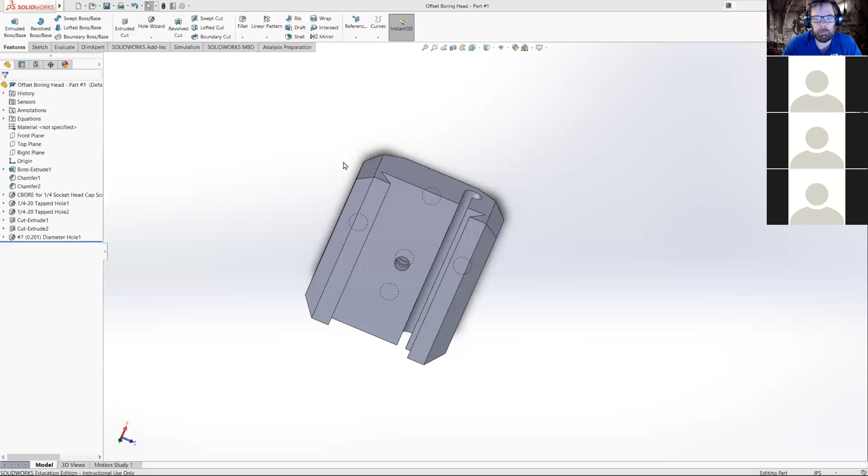Gotcha. So let's get started with some SolidWorks, not Mastercam. Right now, what we're going to talk about today is assemblies. We're going to go over the basics of assemblies. We talked a little bit about it yesterday, and we're going to go into it a little deeper. So basically what we're going to do is make our offset boring head.

So I already have my 6 parts drawn, 1 through 6, materials already determined and all that. So what I want to do is start off with the part that's going to make the most sense as far as which part I start with. Because if you remember from yesterday, whenever I create an assembly, the first discrete part I put in there is going to become fixed. SolidWorks will automatically make it a fixed component.

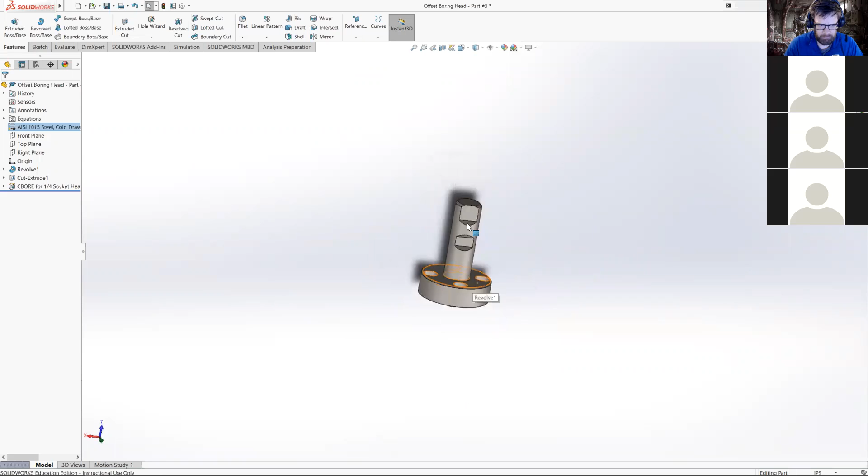So that's something to keep in mind when you're putting these assemblies together, because part number 1 actually slides back and forth on part number 2, or vice versa depending on how you're looking at it. With this, because it's a tool, one way to think about it is: what's the part of the tool that we hold onto? If I think about what part of this I actually hold on to, it'd be the shank. So this is the part I'm going to start with in my assembly.

So I have my parts, they're all fully dimensioned and everything, and from here I'm just going to create an assembly. I go up to new and make assembly from part assembly. Come back to my templates - I don't have any templates for assemblies. You can make templates for assemblies, but in my experience, for the parts I've used, I haven't seen much use for it, so I typically don't do that. So I'm just going to take part number 3.

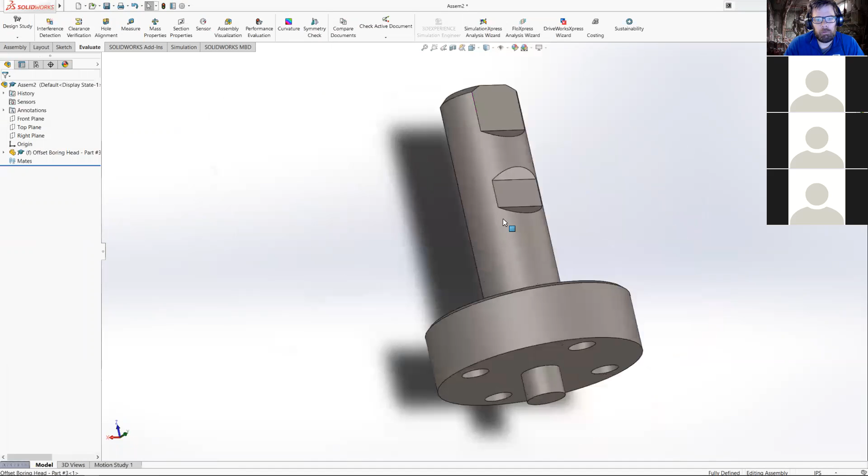That's my shank part, and I'm just going to click out into the ether here. So right now I have my shank part, and I know it's fixed because when I come over here, there's a little F in parentheses next to it - that's my fixed part.

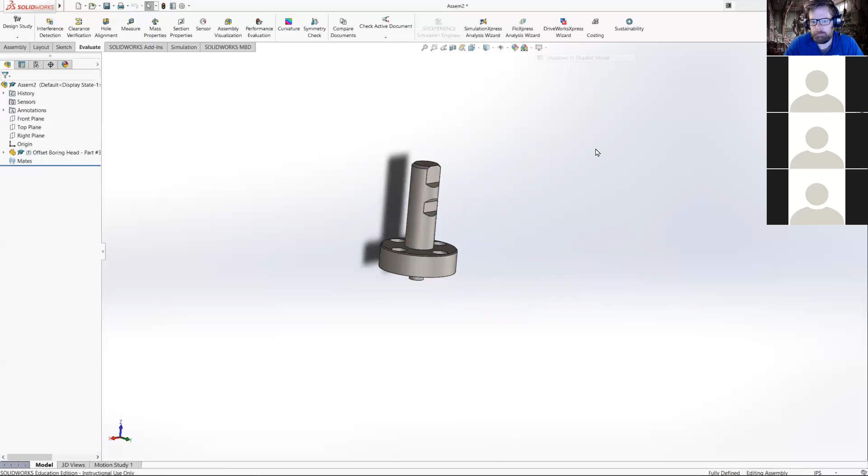I can also tell I'm not really looking at it from the top. If I go to my standard views, my top view is going to be that, or front is going to be that view - top view would be somewhere else. I'm not really going to worry about that, it just changes where the shadow is. If I don't want that, I can just get rid of shadows - that's easier than moving this around. If I did want to move this around, say that really bothers me - obviously if I'm using this, my shadow light's coming from the top, so my shank would be pointing up in that direction.

So let's say I'm being nitpicky here and I want to fix that. All I really need to do is float this guy. Right now it's fixed and I want it to float. Floating just means it doesn't have any constraints on where it lies in our model or assembly. So when we click float, it gets rid of the fixed symbol, and now I can drag this around wherever I want. This in itself isn't really useful because I can move it, but it's still going to maintain its original orientation.

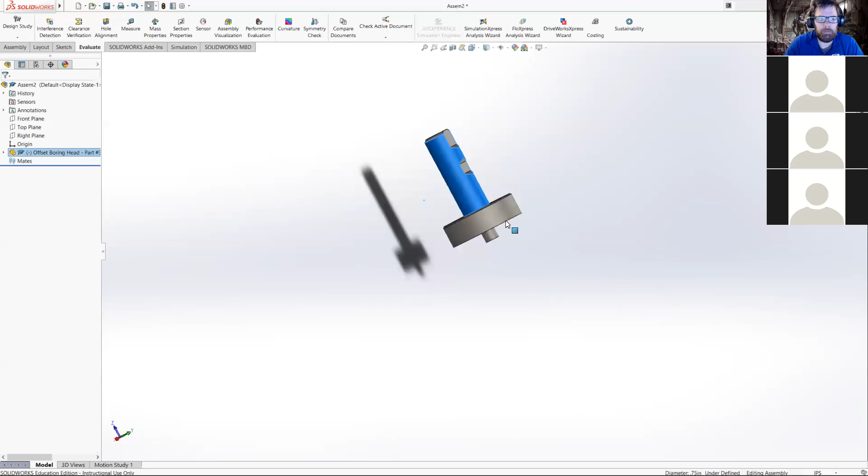So what I can do is right click this and move with triad. Triad is just a gnomon - it's the XYZ. With this, this should look very familiar - this is basically the same as in Mastercam, where we can drag this around.

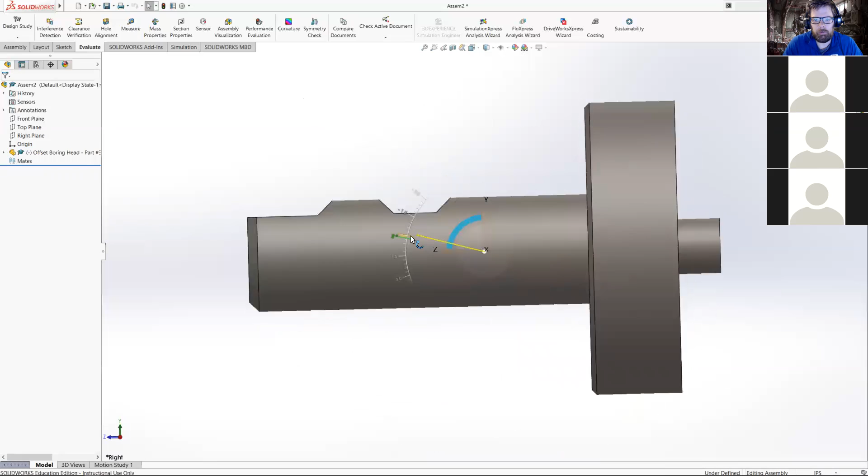Right, so I'm going to undo that. I'm just going to get into a standard view to make life easier. So now I'm looking at it straight from the side. So now when I go from here, 360 is where we are here, and then we're just going to go up to 270.

All right, so if this is the orientation I really wanted to present this assembly in, now I am aligned better, more how I want it to be. If I needed to turn that, I could still do the same thing, move with triad, and turn it around that way. Not really worried about that, but anyway, you can do it.

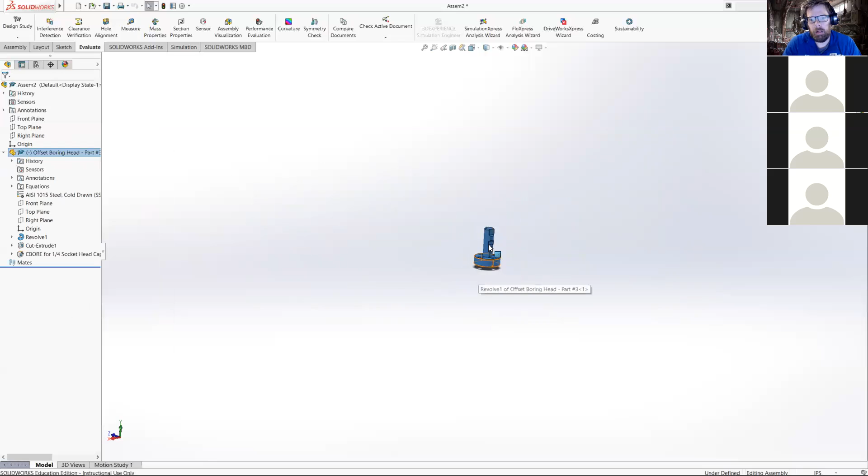So before I start throwing in parts, what I want to do is fix this. So this was floating, or was fixed - I made it floating, and now I'm going to make it fixed again. So again, I just right click and fix, click on the fix button. Yeah, I don't think any of those are fixed.

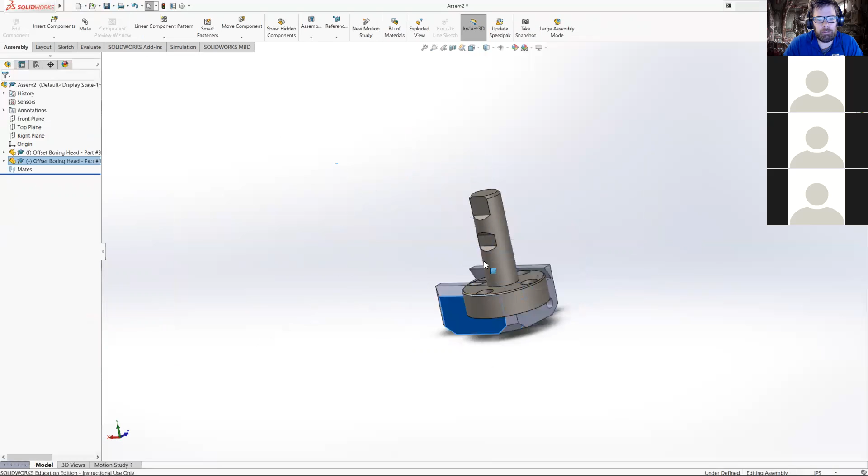All right, the reason I want to do this is because, well, I'll show you in a second. So now I can kind of start throwing in parts. So part 1, I'm just going to drop in there. Now since this is the second part, I look in my feature manager, this does not have the F, so this is free floating. I can drag this wherever I want, literally, because it's not even going to detect any sort of collisions. It doesn't really treat these like solid parts until I tell them to, and really, it's not actually that useful of a tool in SolidWorks. It sounds like it would be, but it's really not.

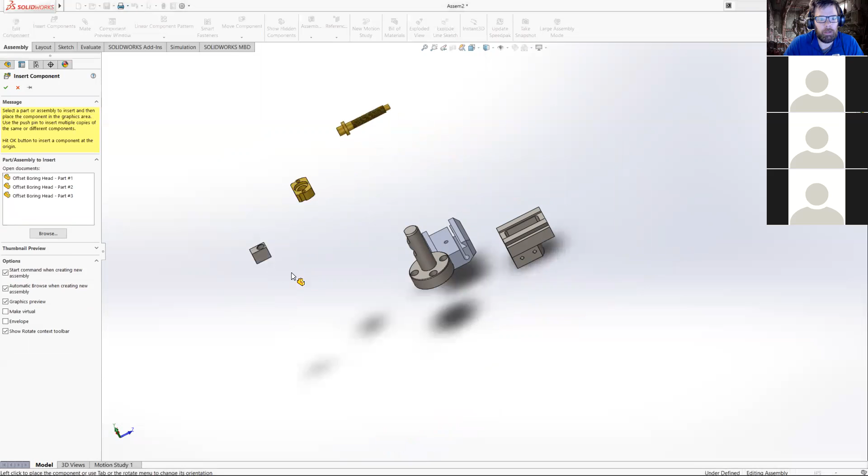All right, so I have parts 1, 2, and 3. I can add these in individually, or what I can also do is a control click. So I can click all 3 of those, and now since all 3 of those are highlighted, I can click - each time I click, it's going to drop the successive part in. All right, so now I have an assembly that is not assembled.

Not super useful. Well, from here, it's basically putting this together like we would if we had these parts in our hand. You know, it's kind of like the skeleton song - hip bone's connected to the leg bone and all that stuff. So really, we're just going to go down the chain and put these parts together.

So when I look at this, I need to figure out how this assembles onto here. So obviously, it's going to need to turn. When I started out doing this, I was just kind of figuring it out on my own, and this is one of those things I actually really struggled with for a while - how to get these parts on here. So the good news is we can just look at the geometry and figure out what this is, or how this is going to fit together. We have a boss here and a hole here and a bolt circle.

So that boss goes in that hole, and these holes line up. So all we're going to do is select that part, and then use this little paperclip guy - that is our mates function. So the mates function is kind of like, or is very similar to relations, and actually, it's the same thing. In fact, when we start getting into this, you'll see a lot of the same concepts.

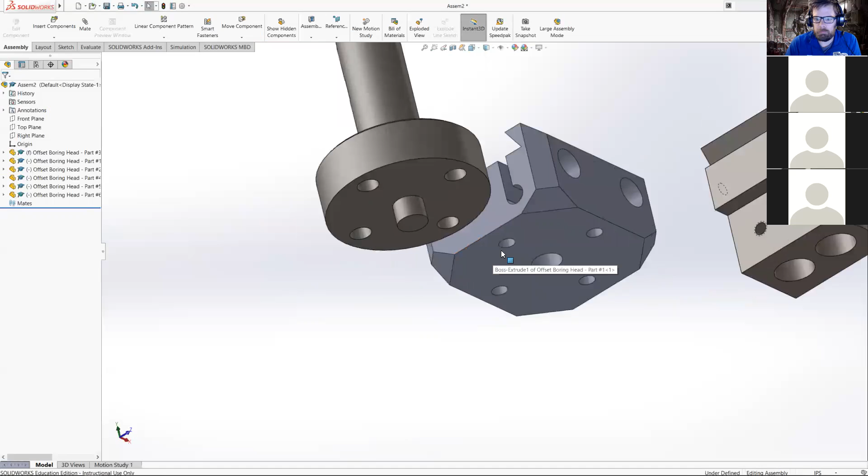So we're going to have perpendicular, we're going to have parallel, we're going to have coaxial or collinear. So we're going to have all these terms that we've kind of learned over the past couple of years, or have learned in blueprint reading or whatever, or GD&T. So some of these terms are going to kind of come back, the concepts and all that.

So it's pretty straightforward. All we're going to do is select the segments that we want to mate these together with. What's going to determine where this is located? Well, if I look over here in X and Z, that's going to be moving across this face, forwards and up and down, left and right. If I do a mate with these two, if I make these coaxial or concentric, that's going to line them up.

But as you can hopefully tell, we can't really violate the laws of physics in class, so what we have to do is flip this around. And that's what this little button, this mate alignment, is. So what's going to happen is it's always going to satisfy this constraint. We're making these two cylinders concentric, and it's going to keep these cylinders concentric regardless of whatever else I do.

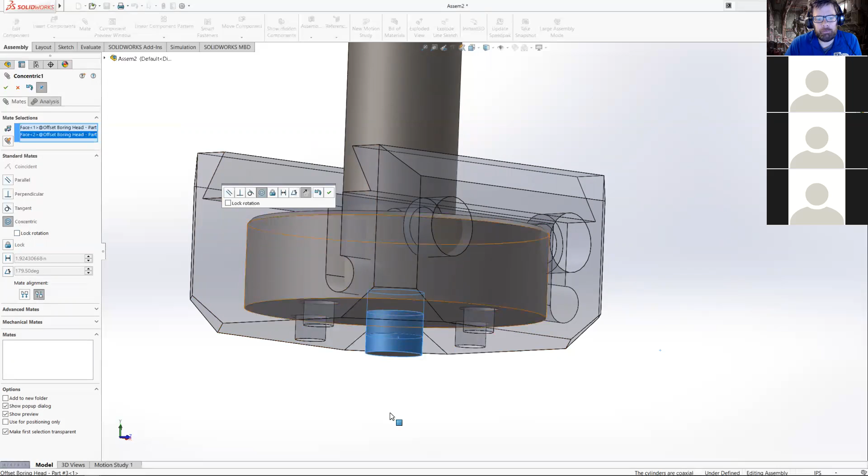I can still move it, if I make these concentric... one more time, there we go. All right, if I make those concentric, then I can do all sorts of stuff. I can still rotate this, I can still move it up and down, because that concentric rule is still being followed. So it's going to force me into following that rule, but I'm not telling it everything.

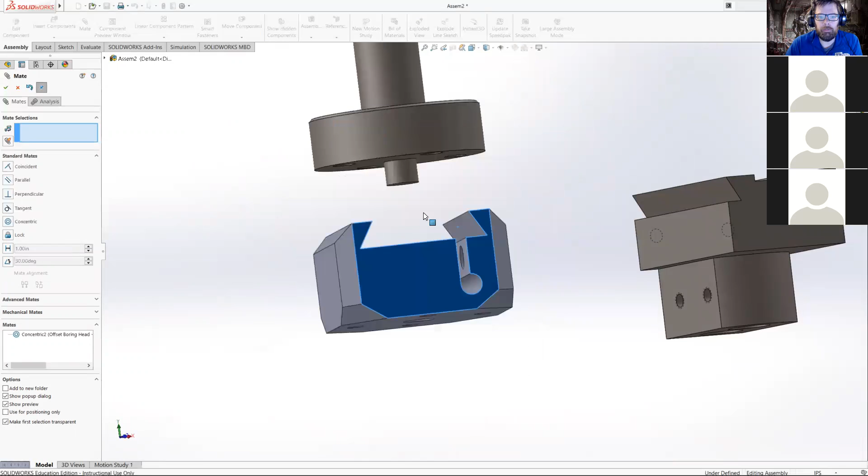So this is kind of like our datum references. We have one datum reference here that's saying location as far as where I'm going, along this plane, up and down, left and right, but it's not determining anything about where this is in Y right now. And this is Y.

That obviously is not lined up how I would like it to be. So all I really need to do is change my alignment, and that's what this button is going to do. It's going to keep this concentric constraint, but it's going to change how that constraint is met, or what direction that constraint is met. So we're going to keep that, and now we're at least in the right physical orientation.

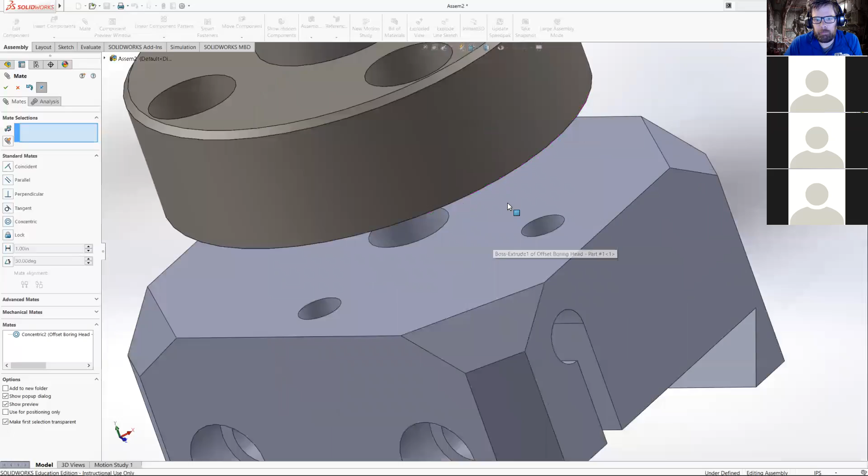And then from here, I like to use 3 mates in order to connect parts together. I kind of think of it as XYZ. Sometimes there are ways we could do this with less than 3. So we're already located in one axis or two axes in our direction, but our third axis is up and down.

And so what we're going to do is just make this surface coincident with this surface. Coincident just means those two parts are occupying the same space. Coincident is really useful—it's one of the ones you'll use more than anything—but it's great for fixing two surfaces together or two lines together, something like that. This is kind of like gluing this part together.

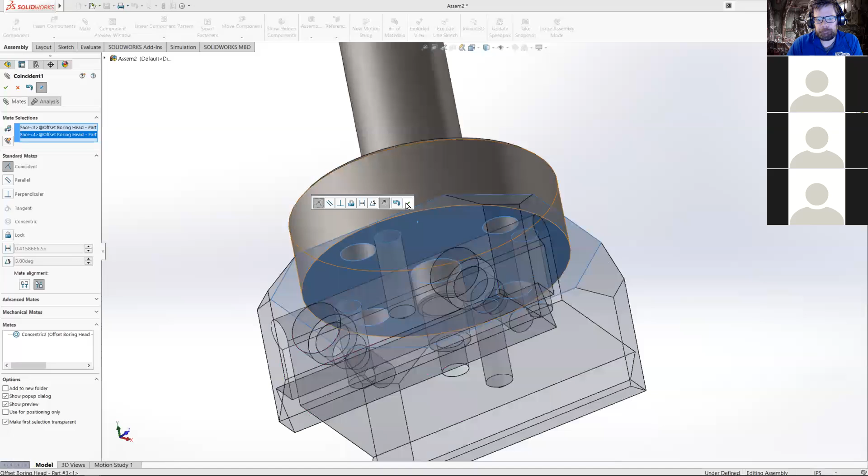So what we might be able to do is use these holes to line this up. If these holes were exactly the same size, I could possibly use a coincident mate with that and that. Instead of using the cylinder, I could possibly use the whole edge. But again, that's not really how I like to do it.

So in this case, what we'll do is create another concentric mate. So we have all of our linear axes—we don't have any freedom of movement in our linear axes, but we still have freedom of movement in a rotational axis. So how do we get rid of that?

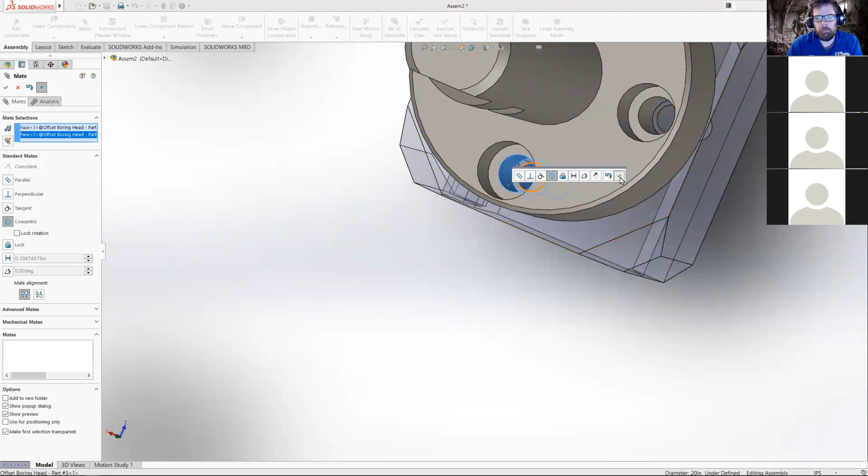Well, there's a variety of ways. We could use our holes—I could say I'm going to make this hole concentric with this hole. And as long as my hole locations are correct, that mate can be satisfied.

But if this hole location is off even by like 1 thousandth of an inch, it won't let you do this. So these holes have to be dimensioned perfectly. If they do not match up perfectly, you will not be able to do this sort of mate. But usually it works out pretty well, because usually these bolt hole circles are a nominal number and all that, so for us it does work.

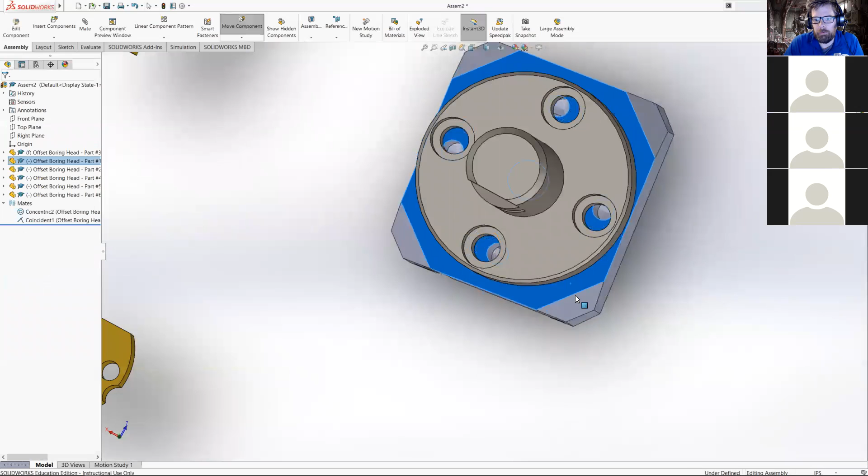But let's just say for some reason it didn't. Maybe this part that I got, maybe I had imported a part from a different manufacturer and their model's just a little bit off. You know, maybe it's conversion error or something like that.

So I'll just open this part real quick. I'm going to go in here and edit this bolt hole circle, changing the diameter from 1.5 inches to 1 inch 501 thousandths.

So now that bolt hole circle is off by 1/1000th of an inch from our mating bolt hole circle. As a second year machinist student, you should know this should be fine, right? In the real world there's nothing wrong with this. We have 30 thousandths of clearance in this hole, so being 1 thou off isn't going to do anything.

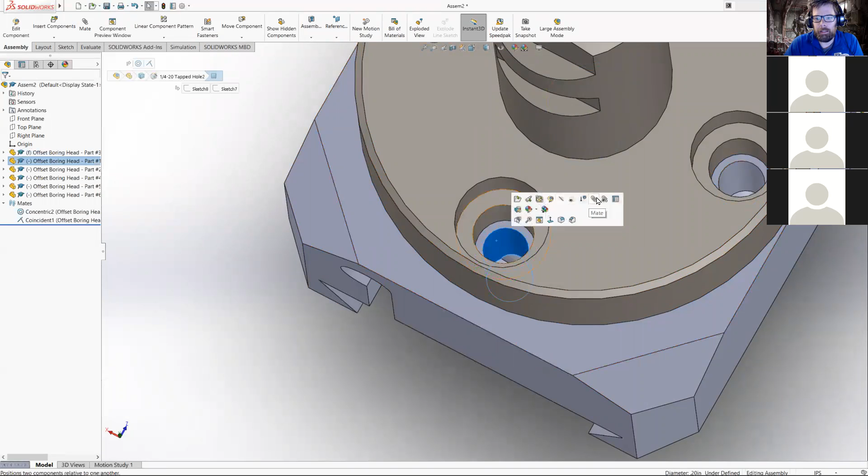But if I try to do this mate now, and don't make a liar out of me... oh, it let me. What the heck? Oh wait, did I save that? Maybe I didn't save it. This really shouldn't let me. This is disappointing.

Let me do this. All right. Huh, well, it used to not let you do that. Anyway, so that does work apparently. Apparently it has some error allowance now.

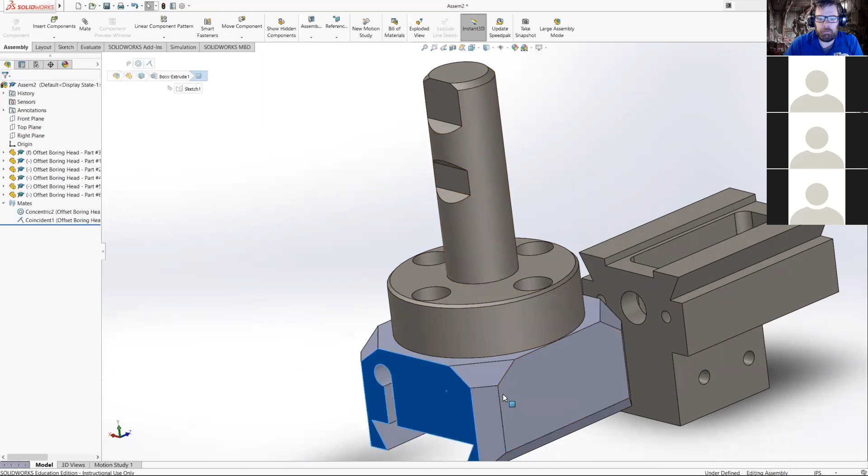But let's just say that didn't work, right? We can also infer from these parts another way that we can line this up. So if I wanted this, I could just say this side is going to be parallel, or that side of my part is going to be parallel with my flats, and that will line these up as well.

You have no idea how many times I fought that. I'm almost having a hard time believing that actually worked, because I've had to fix hole alignments that were off by less than 1,000th of an inch before. Spent a decent amount of time doing that.

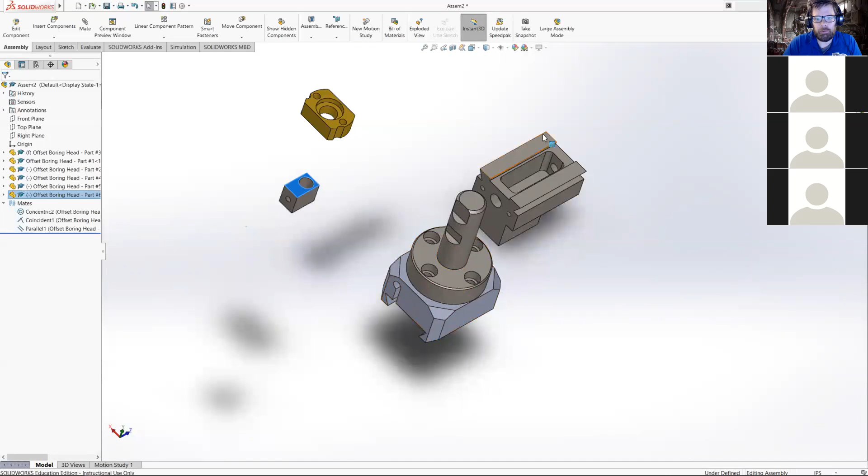So anyway, these two parts now are fully defined, right? An easy way to tell is if I try to drag this. I can drag parts that are not fully defined, underdefined, or not defined at all. But if I try to drag a part that is fully defined, you should see a dialog pop up that says the component is fully defined, it cannot be moved. That's what I'm looking for — I want all my parts to be fully defined.

I'm going to change the material on this so it matches. There we go.

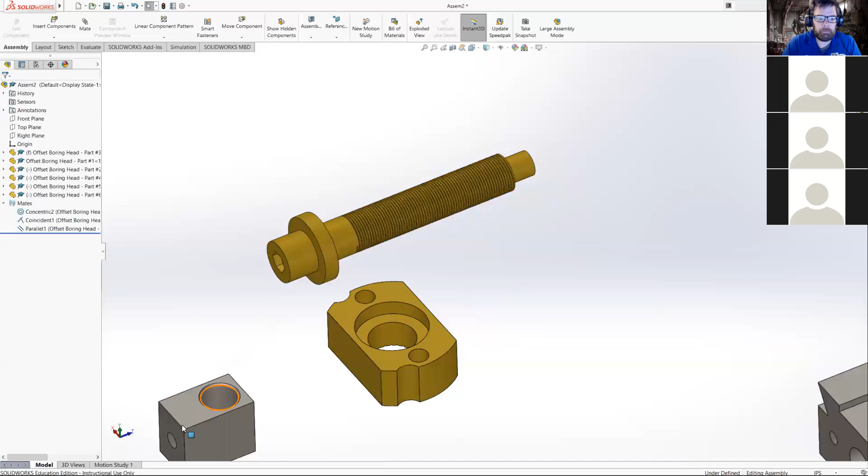Side note, I know I talked about this before. These two parts aren't called out on your prints as being a specific material, or they are, but it might be cold rolled. I have a lot of students make this shaft out of brass, and I don't have any problem with it. I actually think it's a good way to go, brass or bronze or something like that, because when it runs through this you'll have a much smoother motion. It won't be quite as durable as if both were steel, maybe, but yeah, who knows?

All right, anyway, so we're going to keep on moving. At this point, let's just go ahead and line this guy up. So this guy's going to attach to this hole here. Before this, the shank is attached, and a bolt will go through here and attach this guy.

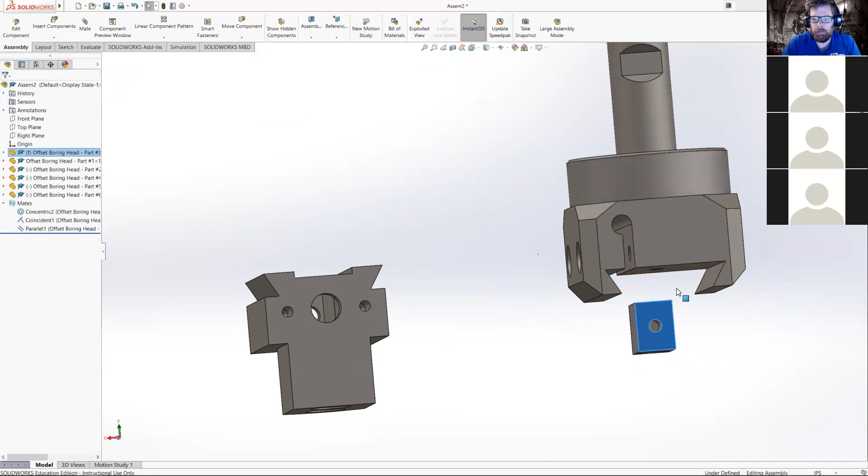So at this point, we're just going to do a mate with that hole to that hole. All right, it automatically lines that up. So again, I have a concentric mate. I still have rotational freedom, and I can still move up and down.

So I will just mate those two surfaces. And you don't necessarily have to select a mate lots of times — usually it will look at what you're selecting and try to figure it out.

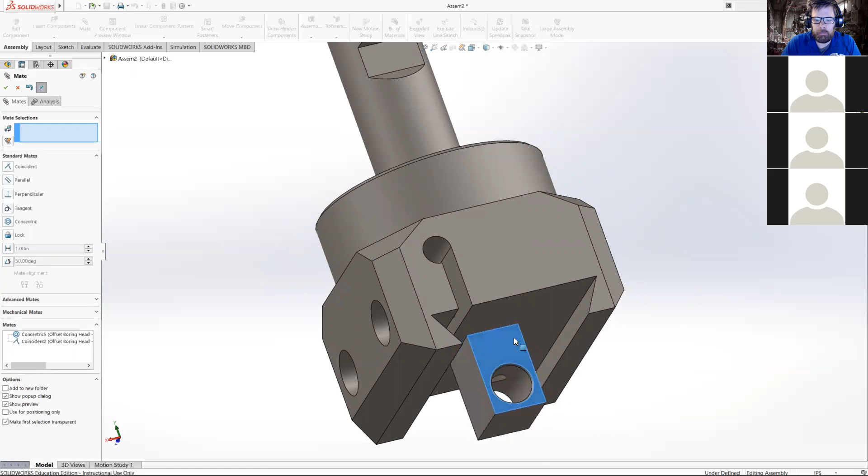Here's probably a better example of using a parallel mate. I don't really have any way of saying this is going to be straight, or that this is coincident with that, but what I can say is this side is going to be parallel with that side.

Oh, you hit the mate button. All right, so I click those two sides. Well, it can't make them coincident because of the other mates constraining this, and it can't be perpendicular for the same reason. So it's going to go through here and use the process of elimination to help you out and figure out what your most likely mate is, just like a dating app.

All right, so then we are going to... hopefully you can see why this is not how you'd actually assemble this in real life.

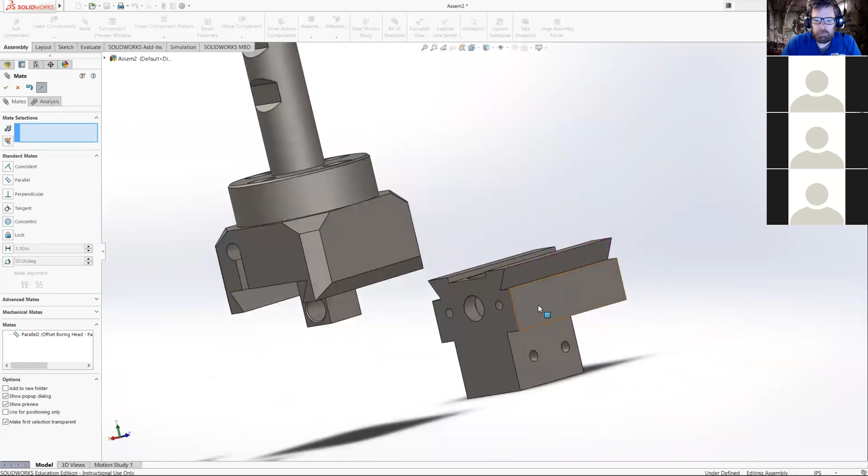Because you're going to have a really hard time getting that dovetail in there at this point. So when we actually make this, the nut goes in that slot. So this nut would go in that slot, and then you would put this in the dovetail, slide it in the dovetail of the base, and then put the screw in and hold it there.

But we don't need to obey the laws of physics today. So what we're going to do is we will just... I believe it's that one, isn't it? So actually, let's just do it that way.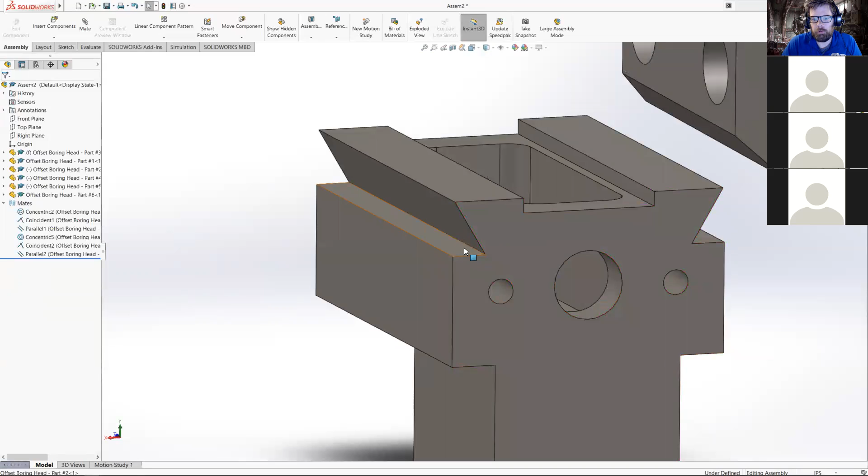We're going to take that shoulder and we are going to make it coincident with that. So because we have two planes that are coincident, right, basically I have a plane defined by that rectangle and a plane defined by that rectangle. So when I have these two planes, it's going to make a coincident mate.

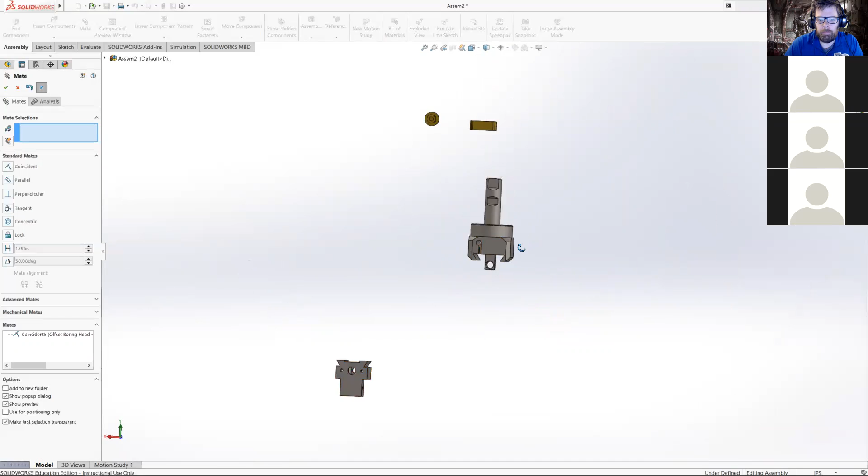And as you can see, I can still drag this around if I come here, right? I can move this around anywhere I want, but it's always going to keep these two sides on the same level. So it might look like I'm dragging this down, but I'm really just changing the position of it to the point that it disappeared. There it is.

So that's actually a good tip. Sometimes you'll be trying to move something around and you get to your part and you're like, oh, what happened to that guy? Where is that part? Well, it's still here. I can see in my feature manager tree that I still have 1, 2, 3, 4, 5, 6.

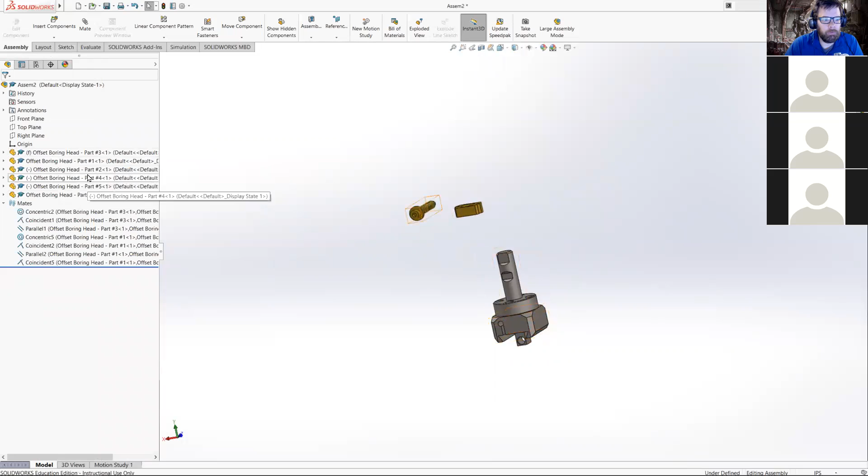Well, just like in Mastercam, this zoom to fit button is going to zoom us all the way out, and then we can try to drag this back to a more reasonable location. All right, now we still have 6 parts.

All right, so like I said, all we're doing is getting there, and so now I'm just going to, we're constrained as far as where we are going in up and down, but we can still move back and forth, in and out, back and forth. So we're going to go back to this guy, but instead of selecting this shoulder, I'm just going to select this line.

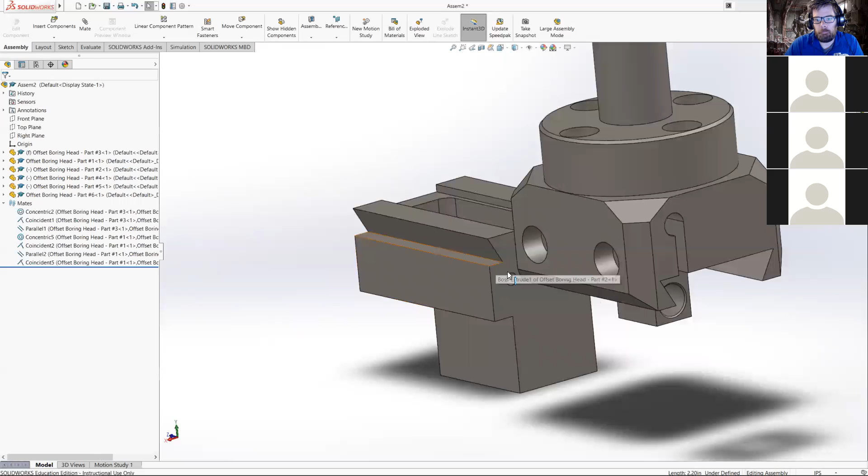Mr. Durkee. Why wouldn't you just make the two holes coaxial? You mean this hole and this hole? Yeah, you could. I just feel like it would make sure everything's lined up for the next parts.

Well, we'll try it, but I actually think that these don't line up. Possibly. No, they do. No, they don't, because it just made those parallel.

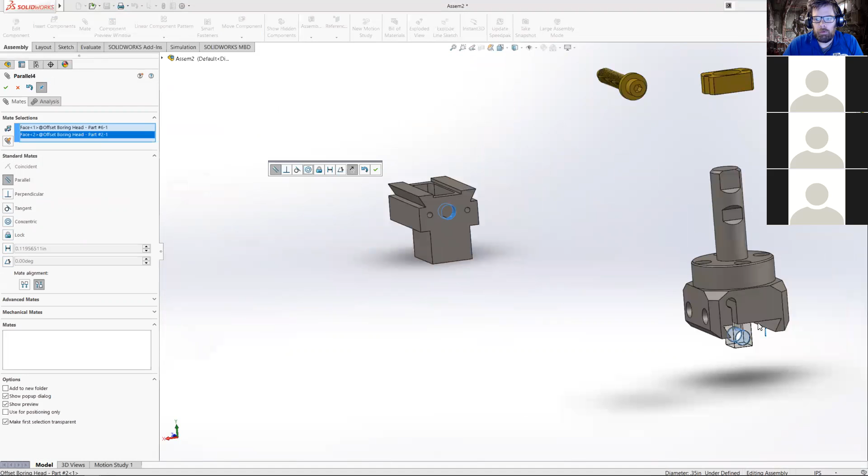All right, so let's delete that. We're gonna delete that. All right, so let's go through here, and if I try to make that coaxial or concentric with that, it's gonna switch to a parallel, and when I try to do concentric and click OK, the selected mate could not be successfully created.

What would you like to do? All right, so the reason why is because this is how... well, here, I'll show you in a second. So I'm just gonna mate this how I was kind of moving down that way. Well actually, I'm gonna back up, just to answer your question a little bit more fully. All right, so that guy's there.

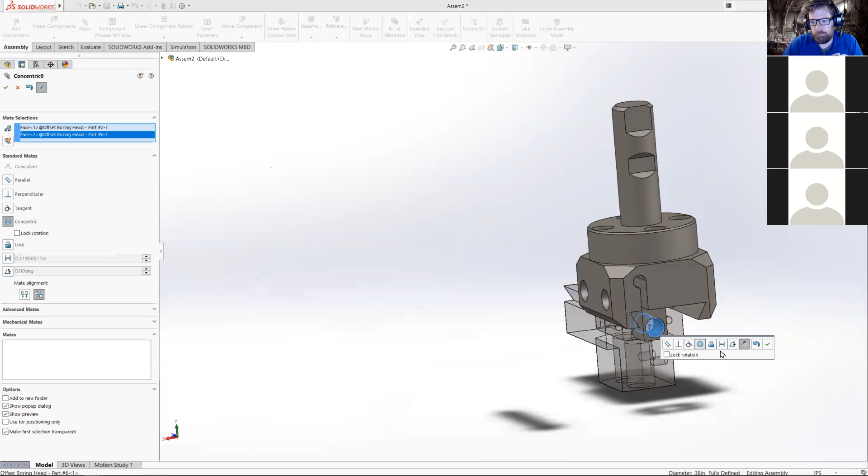So in order to do this with the concentric mate, I still have to have another mate, right? Because now I'm locked in on a rotational. I can still rotate around the axis, and I'm locked in along the z-axis, but I can still move in X and Y, well actually Z. So I'd still need to have some sort of parallel type mate, just to keep it where I want it to go.

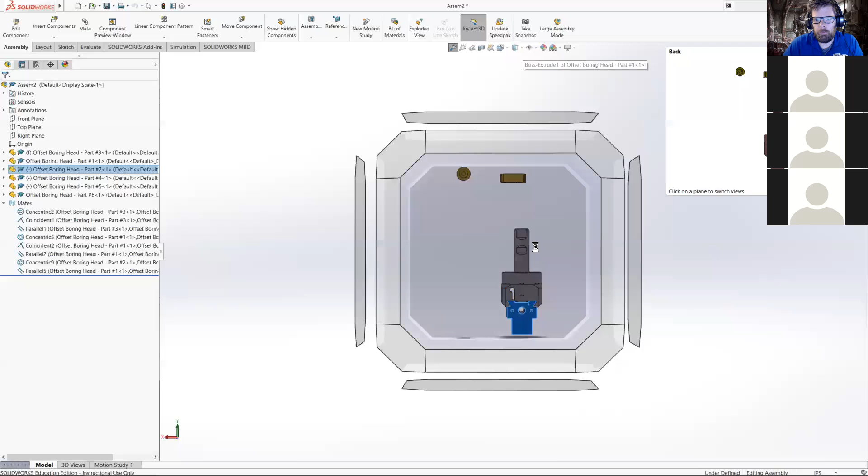Yeah. Here, we'll switch to there. And now when I look at my part, I need to switch to... that's weird. Why?

So if you look, between these two parts, because I'm going off of this, now I have interference. So I have about 7/10 of interference here and 7/10 of interference here. So that's what I was talking about a minute ago, is that these actually don't line up perfectly.

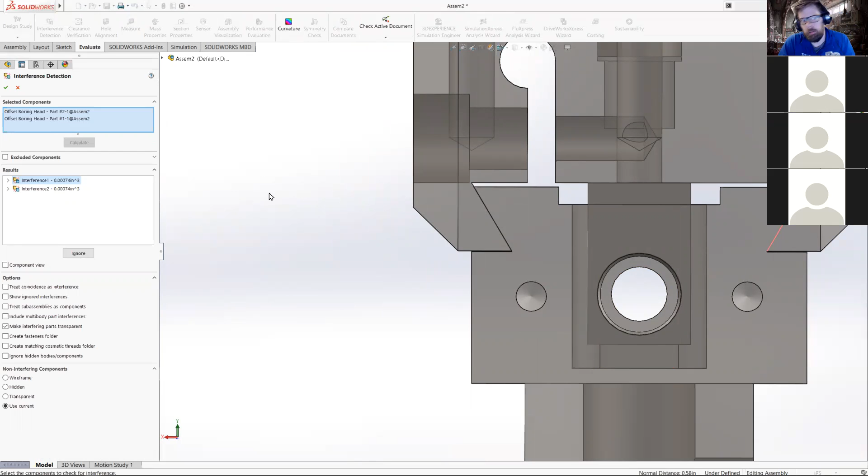So if these are 7/10 off, right, that's not a whole lot, but it's enough for Mastercam to kind of throw a fit.

We can also determine how far apart these are. So I'm just going to change to the measure tool - I talked about it really briefly. It's not real useful, I mean it is useful, but it's not super useful on just individual parts. But when you start getting into assemblies, that's really when it gets to be significantly more useful.

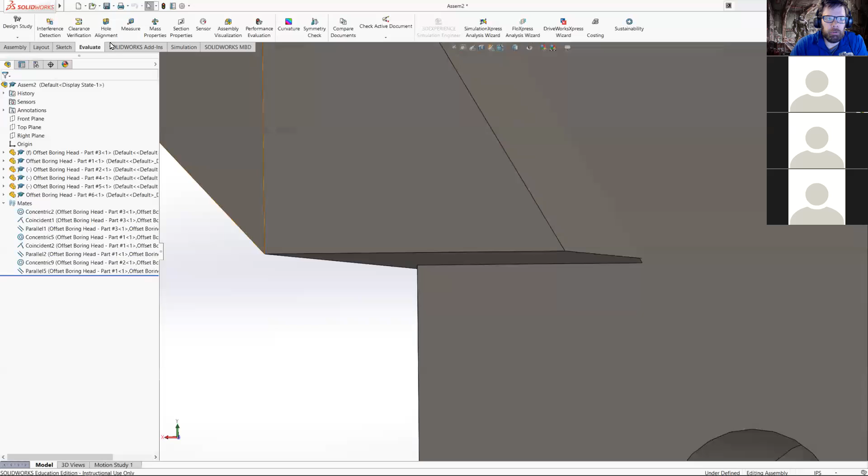So in your evaluate tab or evaluate ribbon, there's a measure button. It just brings up a little tape measure, ruler, pointer, right? So in order to do this, we can click on individual components and it will give us information about that - it'll tell us the area and perimeter of that shape, stuff like that. It'll tell you the length of a side. If you select two components, it'll tell you how those two components are related, like those items intersect, it has 125.26 degree angle between them, all that fun stuff.

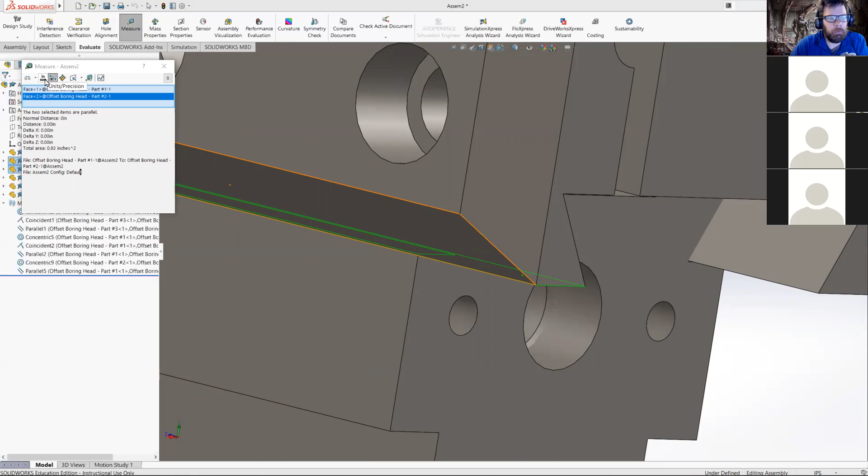We can also use it to see what kind of clearance we have. So if I click on this surface and then I click on this surface here, it'll tell me how much clearance I have. Now right now it's saying I have 0 clearance, but obviously there's a gap there. And the reason why it's saying that is because it's only going to 2 decimal places. So if I click on this units/precision button, it's going to change my units of precision.

I can use a custom setting - I like to do like 5 decimal places. All right, so we have about 3.5 thou clearance in between these two parts.

So when these are lined up, we have interference there and clearance there, which is not actually how this part would be. So that's another answer as to why I did it this way, is because this is really not how these parts are going to fit together. This isn't going to determine how well these parts fit together. What's going to determine that is how well these dovetails fit together.

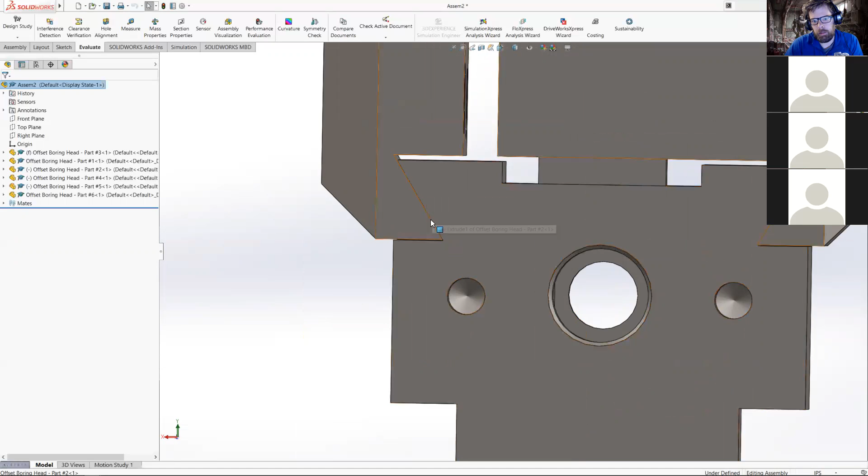So I'm going to get rid of that guy and I'm going to get rid of that guy. And so also what can seem like the easier thing to do is just say, all right, if I know that line, if I want to make that coincident with that line - again, this is how I used to do it. I used to think, all right, well I'm cool now. Well, I'm not really, because all I'm doing is saying that those two axes, those two lines are going to be coaxial. I'm not saying anything about the rest of this part.

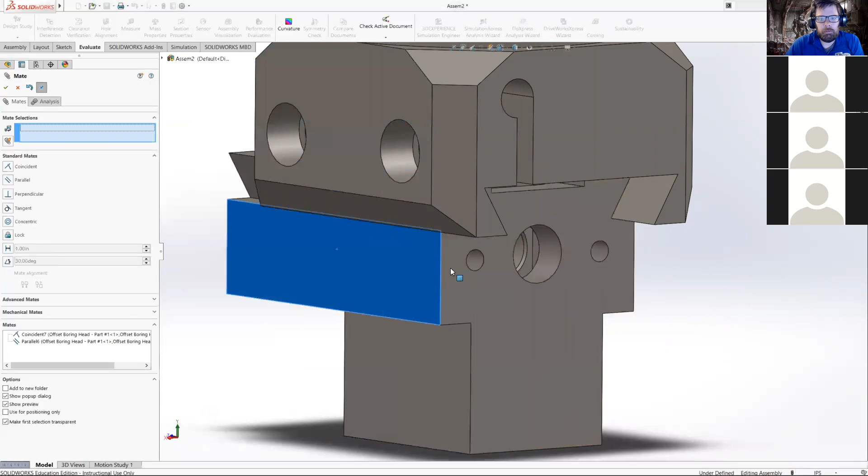Now all I need to do to fix this as far as how it's going to be is to create 2 parallel sides. But now when I look at that, now my dovetail is more aligned.

And I guess the biggest reason why I say I like it this way is because then I can use my evaluate tools, right? I can see how well these 2 parts... what the heck? All right.

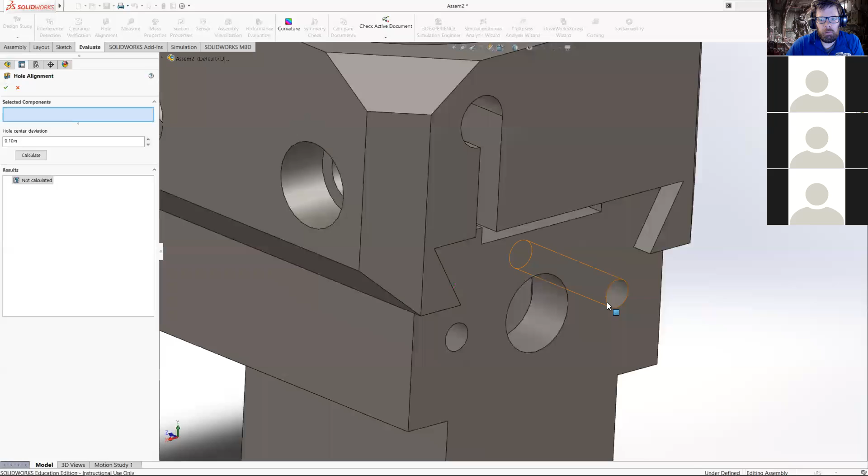Okay, all right, so I can look at that and say that these hole locations - well, it says it's fine. But I can also use my measure tool, might be a better way to do it.

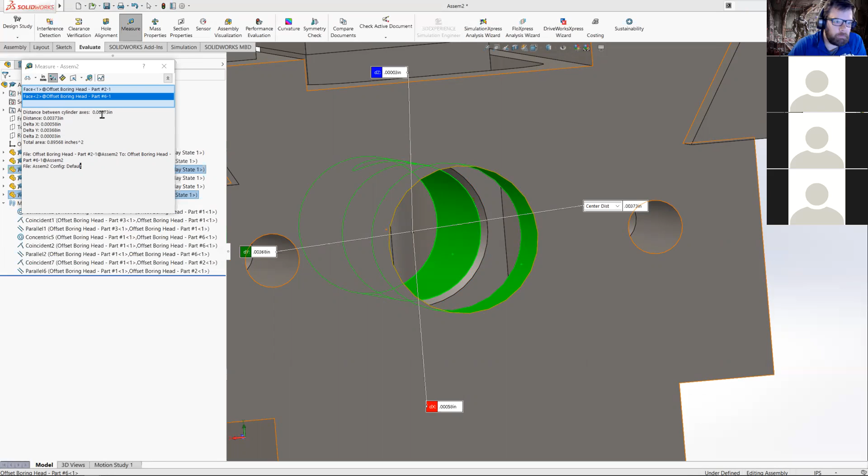And if I take that cylinder, right, and that cylinder, those two cylinders should be coaxial. And what I actually have is a distance of 3 thou and 7/10, which is what our interference was on this before. So at this point, I could go in, I could start moving this hole around to maybe get it aligned better.

And maybe we'll talk about how to do that. I'll write that down.

All right, so we're just gonna keep on moving, keep on trucking. So we have 4 of our 6 parts. So now I'm just gonna go with this guy - this is the easiest one.

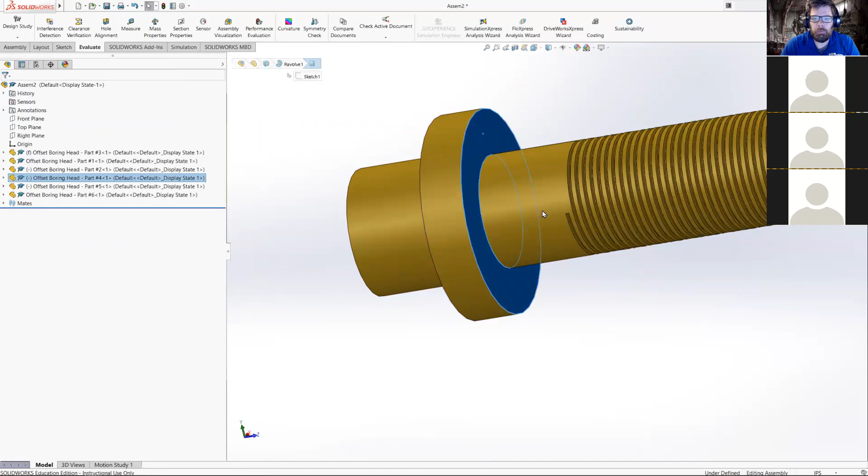So with this, I'm just gonna say this is going to go, that's going to go on this face. And then I'm going to make that coaxial with that. These in. And then this guy is going to go on top of him.

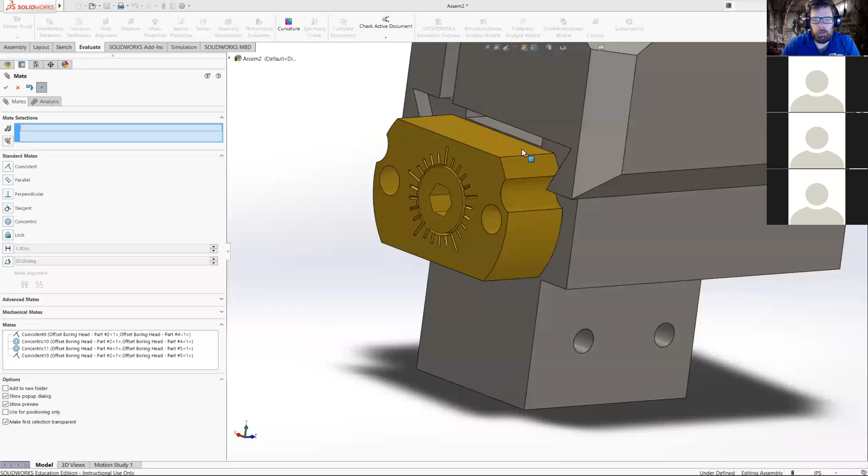And that surface goes to that surface. I'm just, and again, we can still rotate that around. So I'm just going to create that parallel with the bottom of my part to lock it in position that way.

So now on this part, those little notches might make a little bit more sense, right? They're just there to create clearance for that dovetail and so on. And also I can see my hole locations for this guy. One of these is going to be off.

All right, so I'm going to save this as a, well, it's going to want to rebuild. I'm going to save this as my assembly.

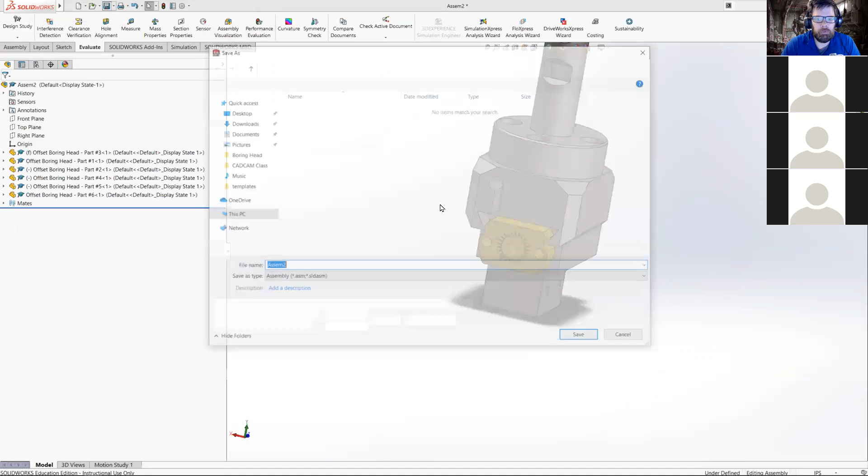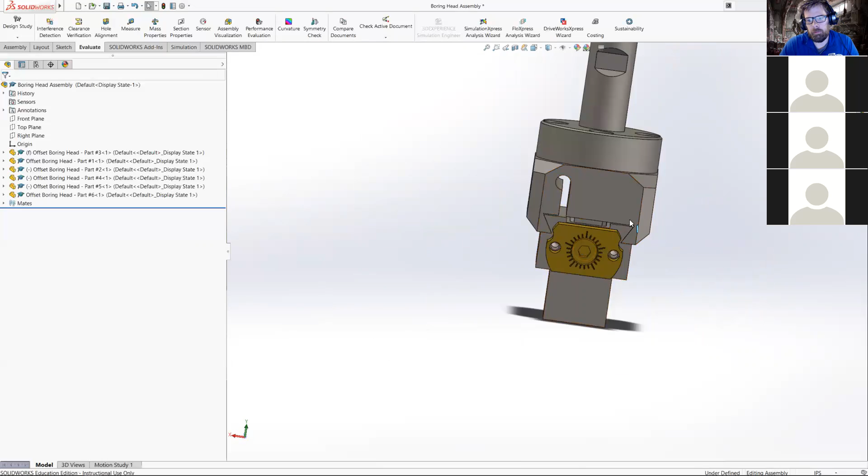All right, so that's all fine and good, right? This does allow us a lot of benefits. I can look through this model and say, am I running on a, am I having clearance issues? Is this the right part for this assembly and all that? So as you can imagine, if I was prototyping this, if I was just creating this for the first time, I can really save myself a lot of time and effort, money, and all that by designing this in here, being able to see these changes, being able to quantify the changes too, before I actually start machining anything.

But another benefit of the assemblies is being able to do bills of materials. And so the first step to being able to do that is actually using the toolbox. So SolidWorks has it built in, and sometimes you have to add it, it has to be like an add-in, which SolidWorks calls an add-in.

Instead of saying extensions or plugins or something like that, it just calls them add-ins. These add-ins are just, sometimes made by SolidWorks, sometimes made by other companies, and they're basically little tools you can use for different uses. So there's actually the add-ins ribbon over here, and these are all different add-in functions, right?

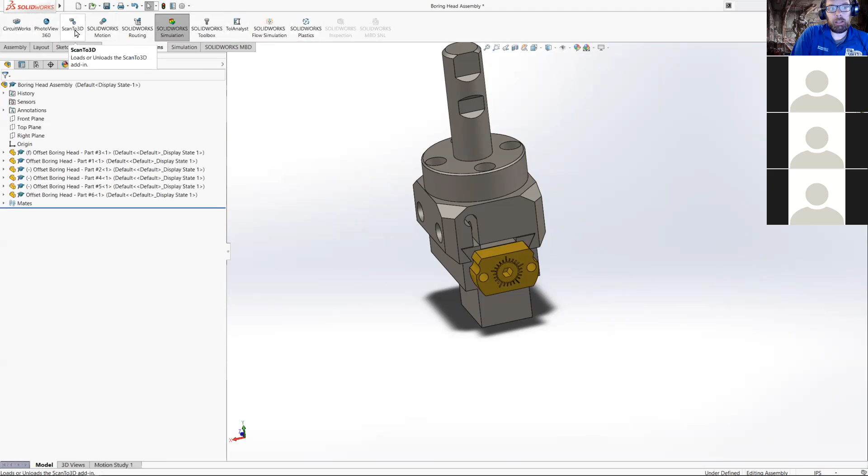So CircuitWorks would be if you need to do circuit diagrams, like layout electrical circuits. PhotoView is going to be a rendering type thing. ScanTo3D is a 3D scanning tool. SolidWorks Motion is motion

analysis, so you can put your parts in motion and it'll kind of show them, do things rotate how you expect them to. Do these components actually connect together how you expect them to? SolidWorks Routing is for electrical and plumbing routing. It's like if you're making a large schematic of a machine and you want to route your wires through it, that's what the routing is for.

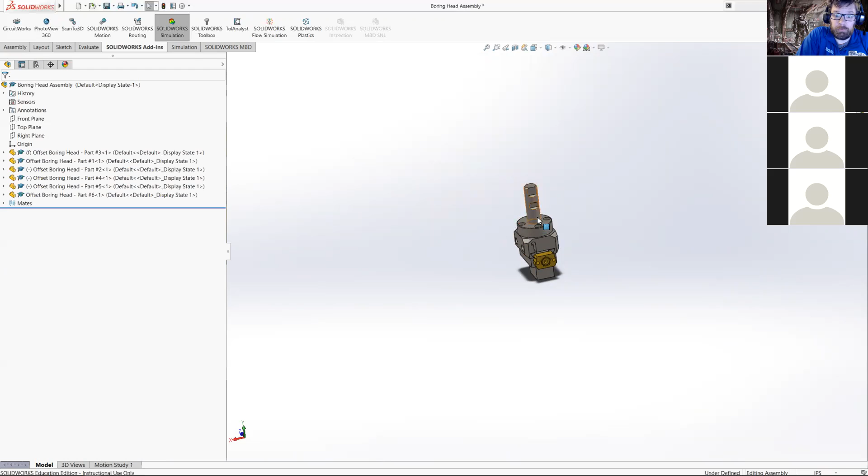SolidWorks Simulation uses physics-based tools, so you can do stress analysis on your parts. You can see, you know, if I have this in a rigid holder and I push this to the side with 200 pounds of force, how much is this shaft going to bend, right? How much is this tool going to be displaced? That's actually one of the coolest parts. It'll take, because it uses your materials, right? That's why we give it a material designation. It'll use your material numbers to figure out what that is.

SolidWorks Toolbox, that's the fasteners and stuff. TolAnalyst is like a GD&T tolerance stacking analysis tool. It'll look at your model and figure out, is this toleranced correctly? Is it fully toleranced, right? Are we using broken chain, full chain, whatever tolerancing?

Flow Simulation is going to be for any sort of fluid, so fluid means air or water. We can do drag analysis on our part, see how much wind resistance our boring head gets when it's going at 100 miles an hour.

SolidWorks Plastics is like an injection molding sort of deal. It's kind of like Flow Simulation, except it's specific to plastics. And then Inspection incorporates CMM type inspection stuff. And I am not sure what MBD SNL is. It's the SolidWorks Saturday Night Live version. I don't know, it's funnier than I am, some days.

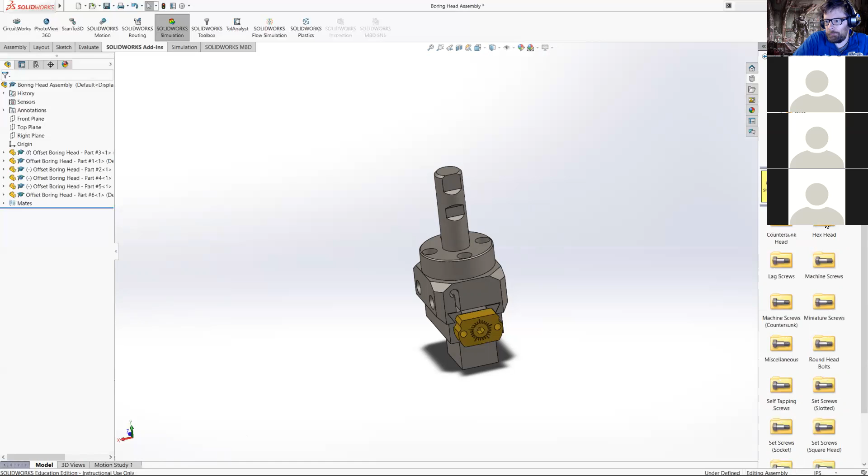But what we're going to use is the ASI or ANSI inches. So you can already see we have all sorts of different part types. We're going to go into bolts and screws because we're going to add some screws into this.

One of the things I like to do whenever I'm creating assemblies is know how many screws I need to put in here. Because if you're like me, it's kind of a pain where you start putting something together, think you have everything you need, and you're missing an 8-32 screw. You're missing that one screw you need in order to get it done.

Basically, we can go through. We have all sorts of different types of screw types. We're just going to do a socket head cap screw, or socket head screws. This is going to include button head, flat head, socket head, and shoulder bolts, or stripper screws, depending on whatever you want to call them.

So from here, it's just really drag and drop. If I drag this over here into that hole, and then unclick - I had my mouse button depressed that whole time - well now it automatically drops a fastener in there. For some reason, it always defaults to the fine thread. Not sure why, because fine threads are a heck of a lot rarer than coarse threads.

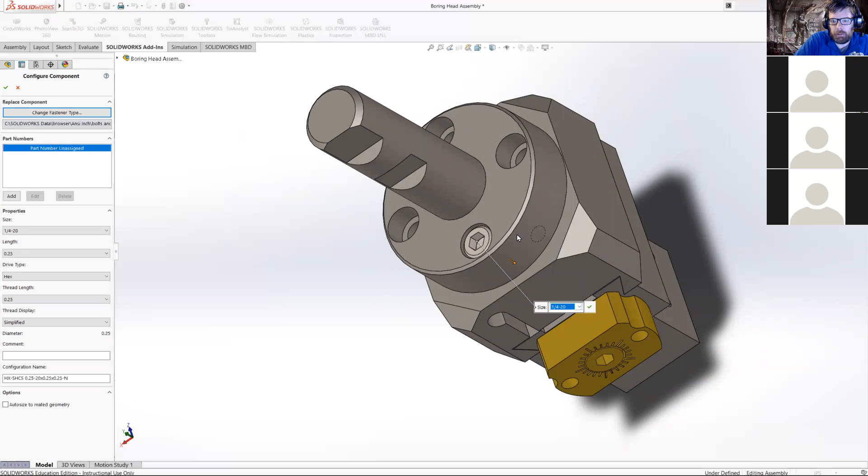So from here, one of the things you can do is make hidden lines visible, so now I can see into my part. Now that I can see into my part, I can actually drag this to determine how much of a thread I need.

So does anybody remember how deep, what's the optimal thread depth to go into a part? Anybody remember? Sorry, what was the question?

So like length of thread - you have a screw going into your part. What do we usually shoot for as far as how far that thread goes into our part? Isn't it like 2 times the diameter? Well, that's usually how deep we tap a hole. And then at least 1 time diameter. Yeah, it's 1.5 times the diameter. So for a 1/4 inch bolt, we're talking about 3/8 of an inch.

So as I drag this, it's going to click to whatever standard fastener lengths I have, right? So you're not going to find a 9/16 - well, actually, maybe you will. You're not going to find a 13/16. How about that, a 1/4-20 socket head cap screw? Nobody - well, maybe somebody makes them, but they're probably incredibly expensive, super overpriced.

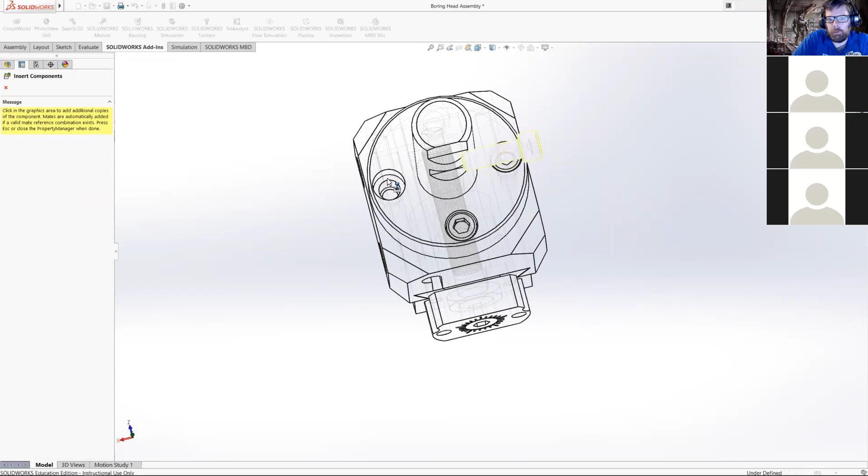So once I click that, it's going to allow me to drop that same fastener wherever I need to. So it's saying, this is the size of screw I need for this hole. Once I click OK, keep going around and plug in these holes with screws. I'm going to click on the face of that counter bore, typically need to click somewhere in that hole. That's the last 1/4 20 3/4 length screw I'm going to put in there. Now I'm going to click X.

Now over here I have my 4 screws in my feature manager. Another thing I like to do, not necessary, but as you can imagine when you start getting into larger assemblies with dozens of parts and dozens of fasteners holding those parts together, this can get pretty crazy. This feature tree can get pretty crazy. So one of the things I like to do with screws is create subfolders.

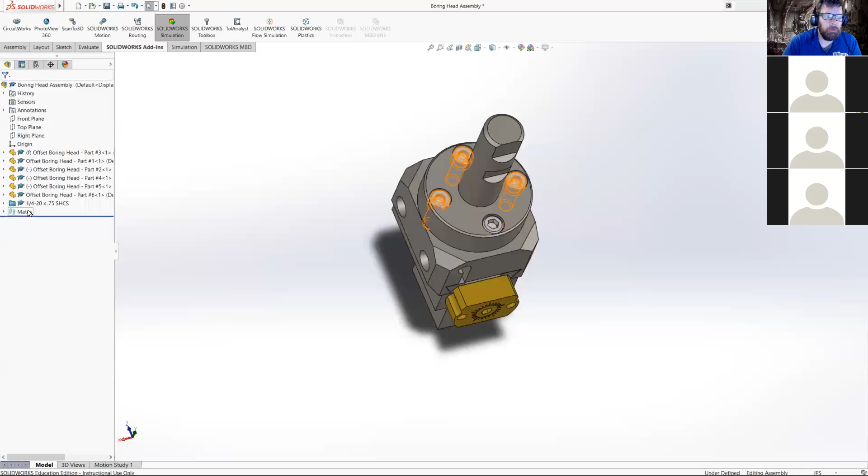I'm going to add to new folder. If I highlight all those and add to new folder, I can say this is going to be my 1/4 by 3/4 socket head cap screws. So now all those fasteners are in a folder instead of being out in the open.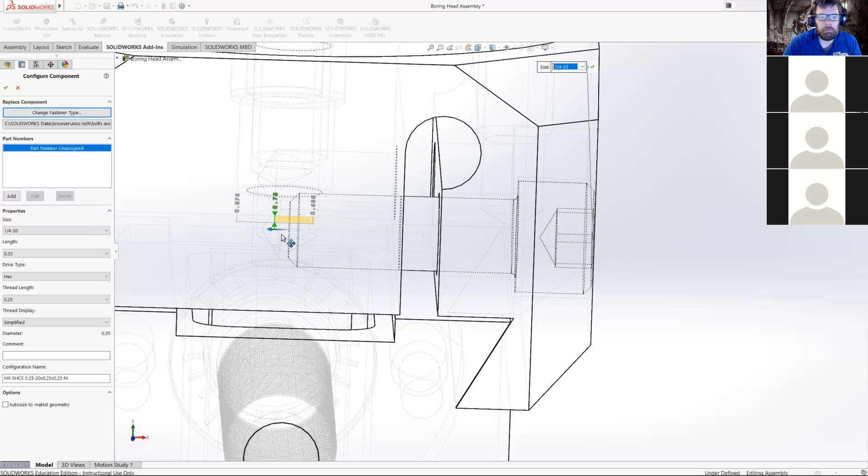From here we would just basically do the same thing over and over again. This is going to be a little goofy probably because this is a very non-standard hole, so we'll see how well it works. I'm going to do hidden lines, change it to 1/4. From here I'm just going to drag this in. So when I'm pretty much even there, I'm 3/4 again, or 3/8 again. So I'm going to go 3/4. Apparently could have done that both times, could use the same fastener on both.

From here I'm just going to again click on that, click X. Now since these are the same size screw, I'm just going to drag those into that folder. So now I have 6 socket cap screws in there. We'll just do that again.

Same thing is going to be here, except we have a different size screw. Still, well actually I take that back, I think I got your button head cap screws for that. I think it looks better.

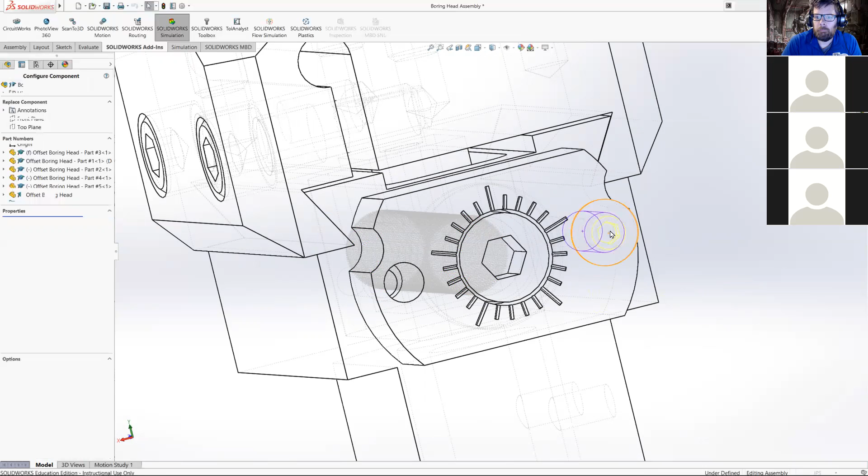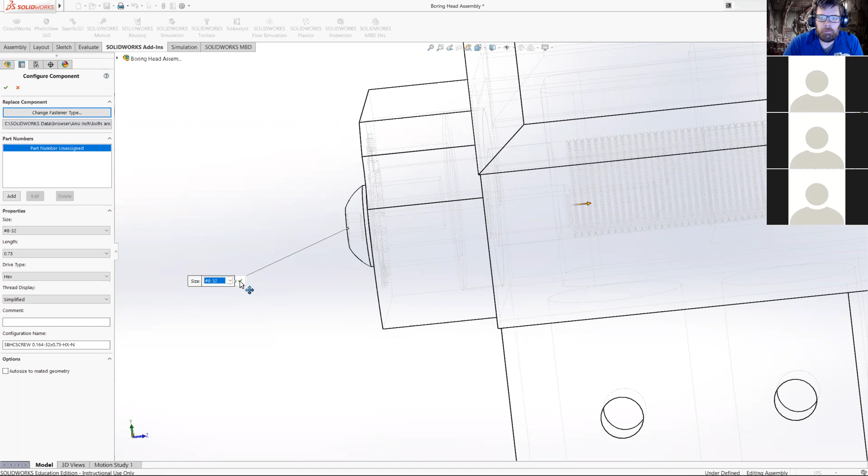836, wow, not familiar with that one. So we're going to do 832, pretty sure that's the hole size in there. Just going to drag that in. So we'll just say 3/4 as well. We'll click OK. Click OK. Why is that not working? Oh, there we go.

Then we have 3 more fasteners. Here we're just going to have set screws in there. We're going to go to the same thing, go into our toolbox, ANSI inch, bolts and screws, then down to set screws, socket type set screws. I believe these are cup point. We're just going to drag that to that hole there.

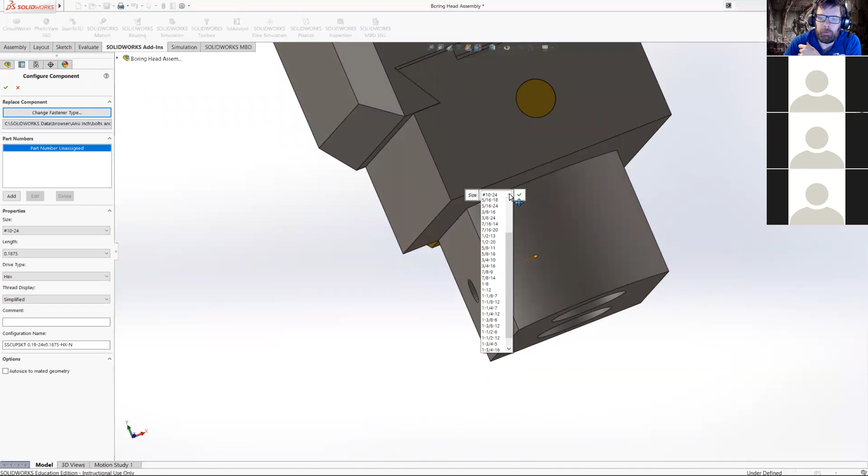It seems like it always defaults to the wrong thread size. Oops, shoot. All right, so I messed that up, I'm just going to undo it. I clicked a checkbox before I actually made it long enough. Well, maybe, because if memory serves, these are really short.

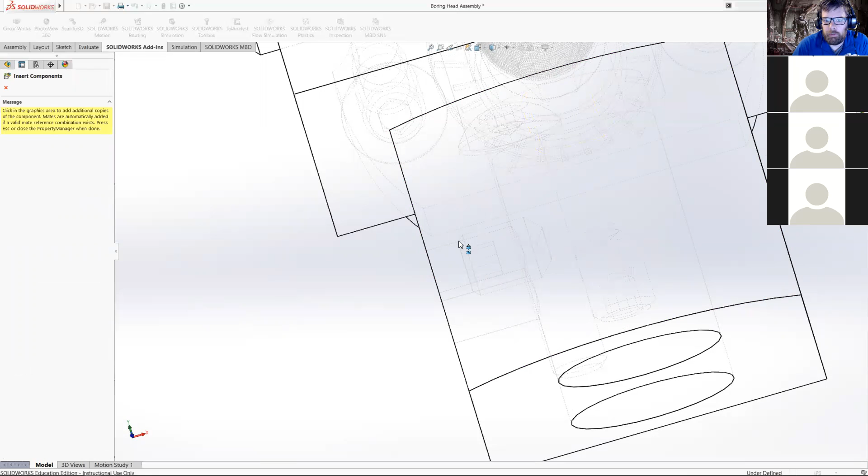Same thing, just going to switch to hidden line view, and I think they're 1/4 inch, so we're going to click OK. Now I made that deep because it's not all, I mean it's actually sitting inside that hole.

Well, that guy didn't want to go in there. When you do your toolbox, when you do your fasteners, this is probably going to happen at some point where you stick it in the wrong spot. Actually we got a couple of things in the wrong spot, like that shouldn't be there.

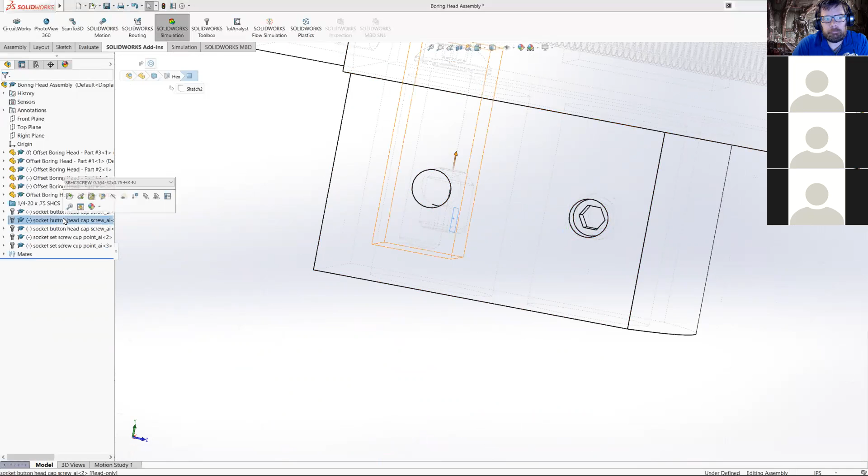So what we can do, basically what happens when we do this is it's doing a few things. One is figuring out how big the hole is, what size fastener you use, but it's also mating this part in there. So if I click on these screws, I can go down and click here, it says mates in boring head assembly. Right now it has this as a concentric mate. I'm going to delete that, and this is going to allow me to move this wherever I want. So now I'm just going to remate this inside this hole.

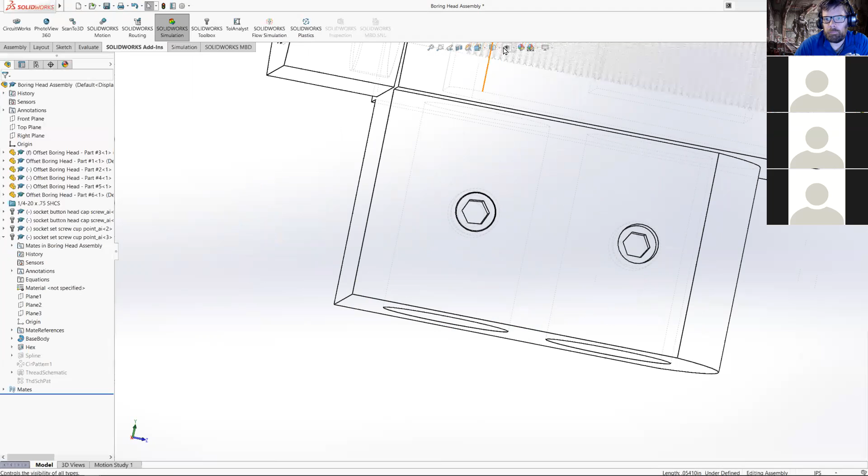And there we go. All right, so now we have both these. I'm going to mate this to this guy just so it'll look better.

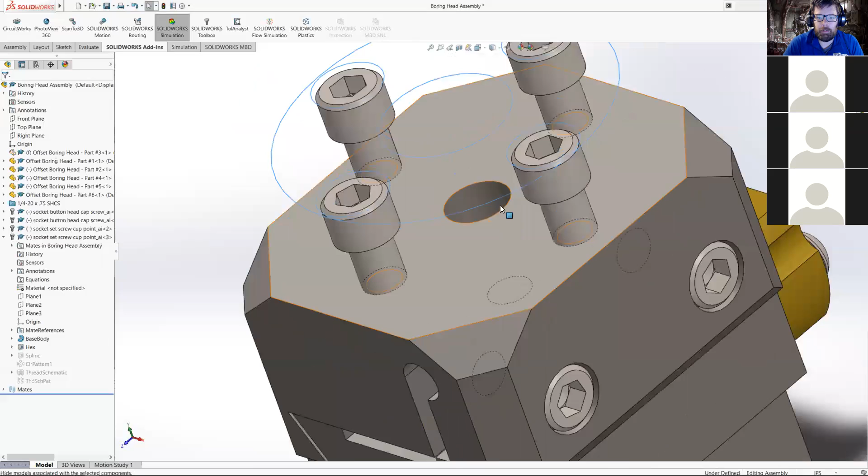All right, then we have one more screw to put in this thing. We talked about it before - it's the screw that holds this little block to our main body of the boring head. You might be looking at it going, how in the hell do we get in there? Pretty easy - if we just hide that one component, that's going to give us a clear view into that hole, which is then going to allow us to connect it.

So now I'm just going to do the same thing one more time. Socket head screws. And I'm just going to drop it down into that hole. Maybe.

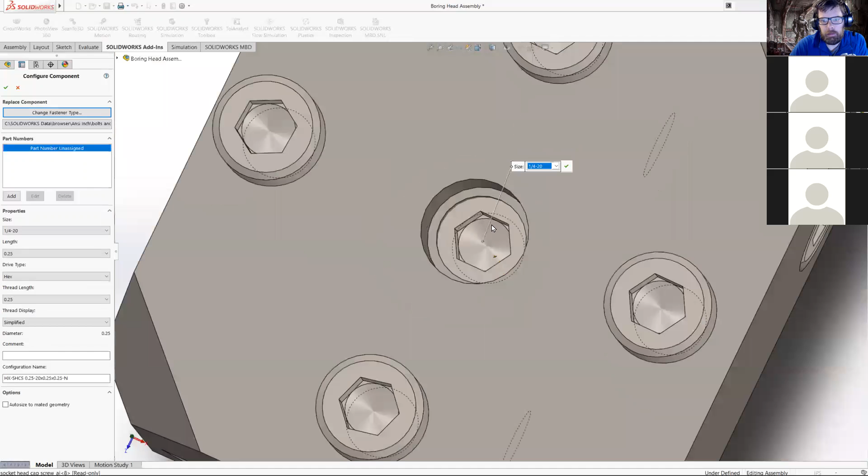I can't remember - I believe that's a... So sometimes this does a really great job of selecting what screw to use. Other times it does not. So I believe that's a 10-32 hole in that screw or in that block, but I don't know for sure. So an easy way to check that is if I click on that part.

So that's part number 6. In this feature manager, I can open up the tree just like I can if this was off on its own. The feature manager here is going to match - it's going to have the same feature manager options in here as it does for our assembly. In this case, I can just click on the arrow next to that part and look at it and say, all right, that is a 10-32 hole. So I know I need to put a 10-32 screw in there.

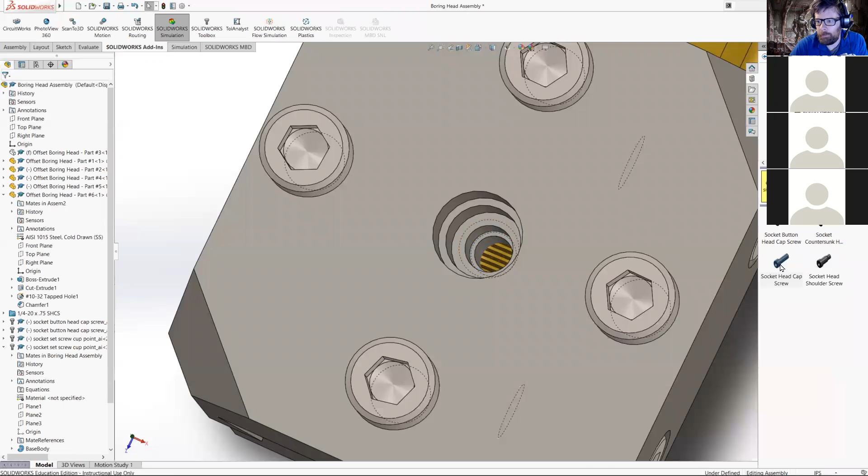It's not really figuring this out very well because this is kind of a goofy hole, kind of a non-standard hole, so sometimes it has trouble with holes like that. So what I'm going to do is just come here, put it on that, and I'm just going to manually change my screw. I've tried fighting with it before, and it's just typically easier to take the path of least resistance for this.

But this is actually one of the more useful tools for us on this part, because it allows us to see how much of a screw I can put in there before I start running into this screw. So if I try to put a 5/8 screw in there, that's going to be interfering with the screw that makes the adjustments. Even if I put a 5 or a 9/16 screw in there, it's probably going to start touching. So I want to make sure I'm using a 1/2-inch screw or less.

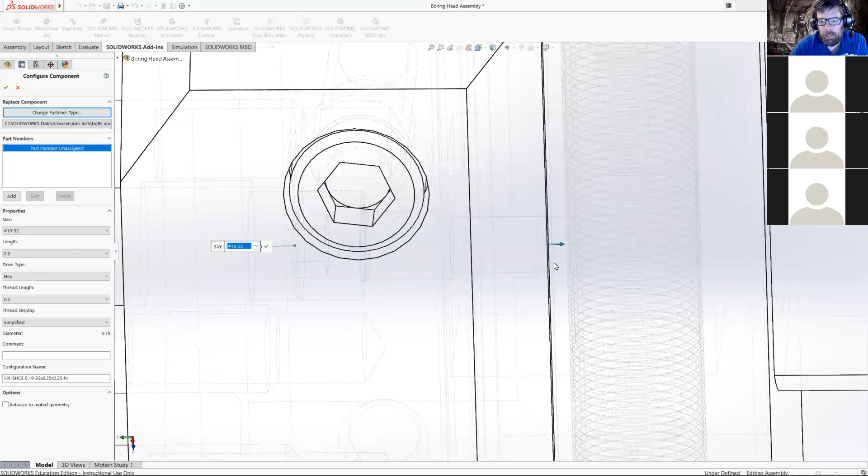I'll click OK. I only need one of those. All right, and then I will just make that guy visible again. And there you go. So now we have a fully dimensioned, fully put together part in here.

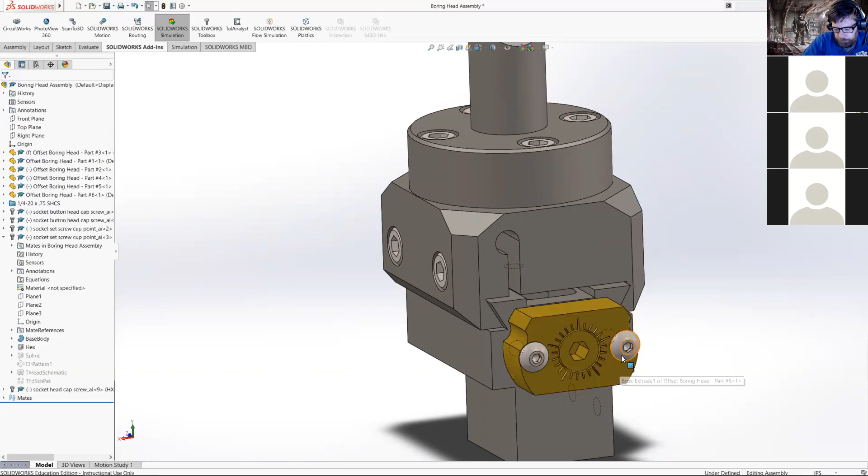Like I was saying, one of the nice things about being able to use the toolbox and putting this stuff in there is that it allows us to make a bill of materials. So I think that's what we'll do tomorrow. We'll talk about troubleshooting, because obviously there's a couple issues in here, and figuring out where our issues are, in case you didn't know what troubleshooting was. We'll go over how to troubleshoot it, change hole alignments, and then we'll also create a print of this, maybe try to make an exploded view, and also create a bill of materials. So that's what we'll do tomorrow.

Does anybody have any questions or anything that you'd like me to cover? I think I'm good. Okay.

All right, well Mark, like I said, I think Paris... actually I just got an email while - yeah, I got a phone call while you were teaching. Okay, that's probably Paris. So yeah, she's probably already gotten in touch with you. But if you have any issues, please let me know as soon as you do, so we can try to get them resolved. Gotcha. So, but yeah, if you guys don't have any questions, that's it for me today. Okay. Sounds good. All right, well, I'll see you tomorrow then. See you tomorrow. All right, have a good one.